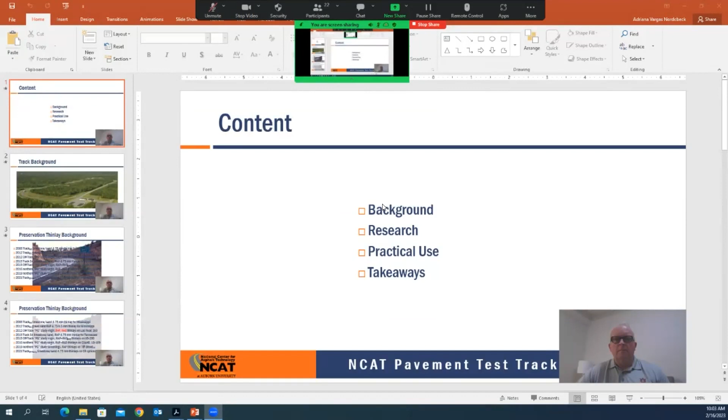Thanks, Travis. As always, I'll start by providing a little background, and then our PI, Dr. Adriana Vargas, will come in and discuss the research we've done with these types of mixes. We'll have some discussion on practical use, and finally I'll come back in at the end to provide some takeaways.

This all starts with the test track for us. I grew up with the Alabama DOT, and frankly I had a bias against the performance potential of the types of mixes we're discussing today, the smaller, finer screenings type mixes. I was taught at the DOT that these mixes are okay for low volume roads, but we have to be careful in how we use them with higher traffic volumes. The track completely changed my mind about that.

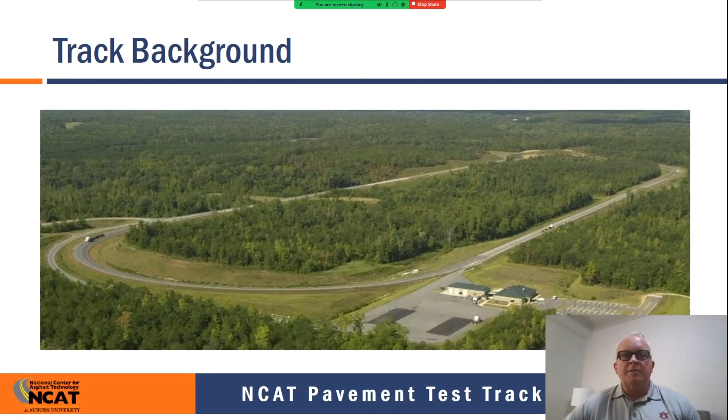We like to say that we're data people. We let the data speak with the research we do at the NCAT pavement test track and on the off-track test sections we've done, and that certainly is the case for the mixes we're talking about today.

I'm going to go through the track history and background of our experience with these types of mixes. For us, it all goes back to test section W6 on the 2003 track, the 2003 three-year research cycle, and everything else we did on and off the track is sort of a cousin to that mix we put on the track back in 2003 — which is still there, by the way, 20 years later and 65 million ESALs plus or minus later. This mix was a limestone screenings and sand mix.

The screenings are 70% limestone screenings, 30% hard sand. It's a natural sand, but it's processed, so it's really angular—kind of like a processed gravel screenings type material. It was a 4.75 NMAS mix that we put on the test track in a 3/4 inch lift.

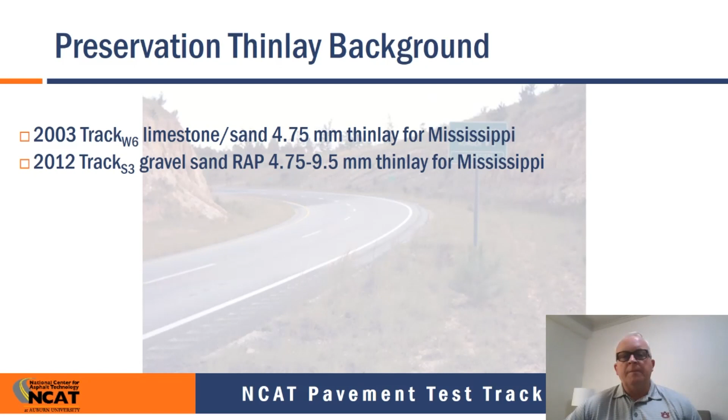That was in 2003 on section W6 for the state of Mississippi. Fast forward through the '03, '06, and '09 tracks—after 30 million ESALs through those three research cycles, that mix just really looked armor plated. It was providing good friction numbers. There's no cracking, no rutting. It just looks spectacular. It's on a perpetual foundation, but that's because when you put things on the track on a perpetual foundation, you're really trying to isolate the stresses to the surface layer, and that's certainly the case with this test section.

So in 2012, after those three successful research cycles, the state of Mississippi came back and said, hey, we would like to create a mix specification that can either be a 4.75 or a 9.5. There's some flexibility there so our contractors can use some of the gravel sands we have that are just scrap stockpiles left over from our Superpave aggregate processing. So we're building up a surplus of those materials.

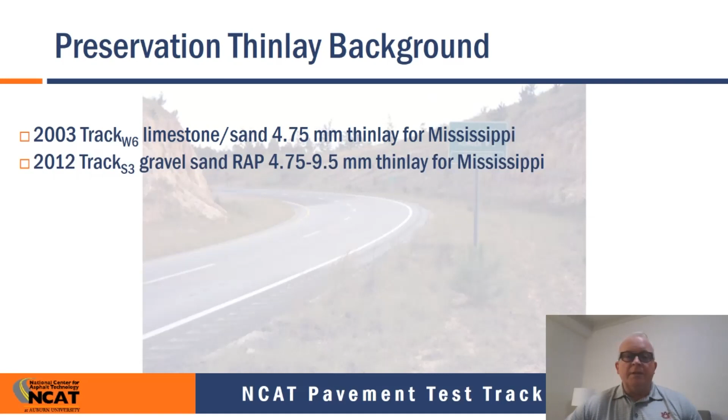That mix had RAP in it—I think it was 25% RAP. And so we put that on the track in 2012. It's still there. Section W6 and section S3 are still on the track, and they're still performing well.

In 2012, we went off track to do our first pavement preservation experiment, on Lee Road 159. So we looked back at our experience on the track and said, well, that limestone screenings and sand mix in W6 still looks great. Let's use that mix—it's really easy to run, very predictable. And so we used that as our core thin lay mix on Lee Road 159.

There are several different versions of that mix with different types of binders, including one version that's a 100% RAP cold recycle mix. There's a RAP version, a high RAP version that's 50% fine fractionated RAP, and then a 5% post-consumer shingles version of that mix. All those mixes are still in service on Lee Road 159, and this summer will be 11 years.

Go one step farther to the 2015 three-year research cycle on the track. Tennessee looked at what Mississippi had done in W6 and S3 and said, okay, in section S4—test section number 4 on the south tangent—we want to do the same kind of thing. We're going to do a limestone and sand mix, not the same limestone, this is Tennessee limestone. It's going to have RAP in it, and it's going to be a 4.75 thin lay, about 1.25 inches thick. They wanted to see if they could use it in a little bit thicker lift, because everything we had previously done had been either 3/4 of an inch or 1 inch.

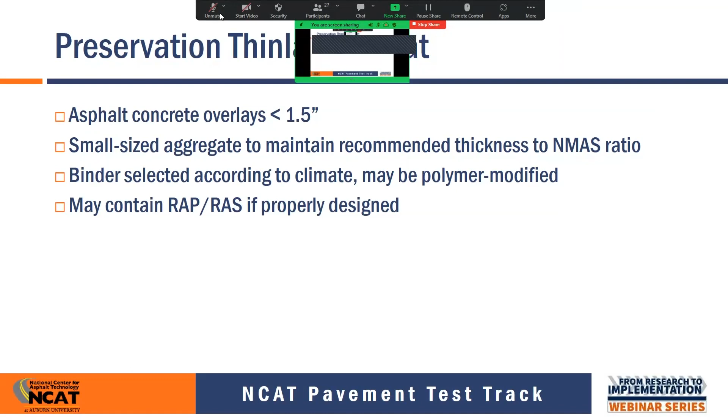I'm going to be talking about the thin lays and emphasizing what we have done for the PG study, since those were specifically designed with preservation in mind. But I wanted to start by giving a quick recap of what these thin lays are.

When we're talking about thin lays for preservation, if you ask anyone what a thin overlay is, you'll get different answers. There's no official definition, but we're generally talking anything less than 1.5 inches, probably somewhere around 3/4 of an inch to 1.5 inches. Most of our thin lays are 3/4 of an inch, we have a few that are 1 inch thick, and 1.5 inches is on the thicker side.

If we're going that thin, we need small sized aggregate to accommodate the thickness-to-nominal-maximum-aggregate-size ratio. In our case, our thin overlays use 4.75 millimeter aggregate, as Buzz was saying.

The binder and everything else is selected just like with a normal design. You can have neat binder, polymer modified binder, or RAP and RAS, as Buzz was saying. If you properly design it, hopefully you get the best out of it. But essentially, you're just doing an asphalt concrete and placing it very thin.

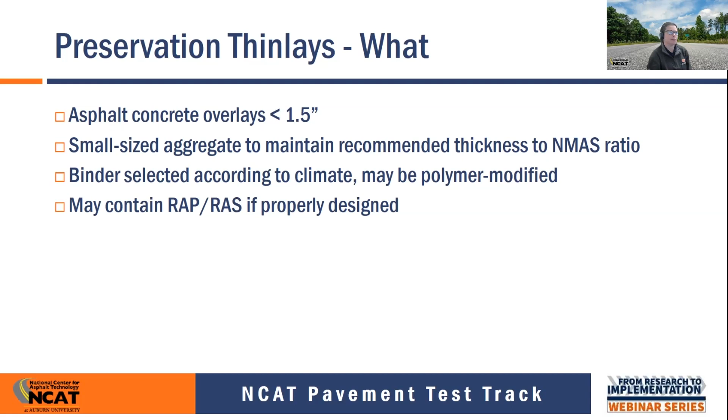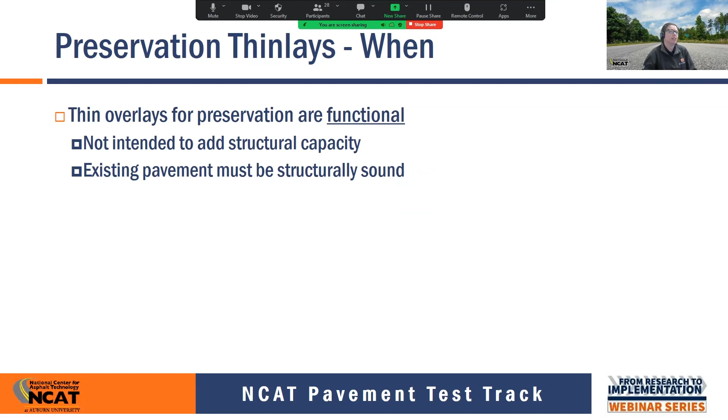When do we want to do a thin overlay pavement preservation treatment? Even though they're overlays, these are still functional treatments, so we want a pavement that is in good structural condition. It can have some distresses, but they shouldn't be load-related or structure-related. You have to have a good pavement to put it over if you want to truly get the best out of pavement preservation.

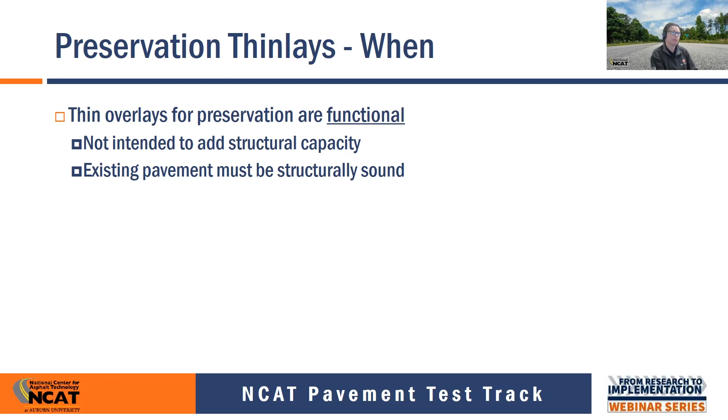Where do we want to use them? We can address things like raveling, oxidation, minor cracking, minor surface irregularities, and skid problems—those are all things you can address with a thin lay. And as you'll see later, we can also put them as a wearing surface on cold recycled bases, which is what we did on US 280 and 70th Street in Minnesota.

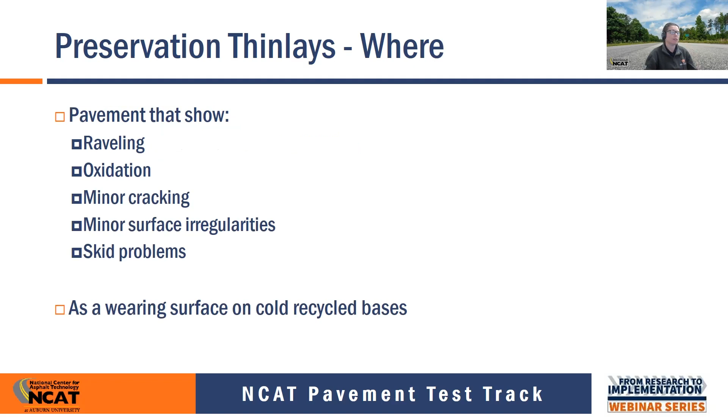And how we do them, it is not that different from just doing a regular paving lift. But there are things that you have to watch out for during the whole process.

For production, for example, if you're going to use the finer aggregate, it's easier to have moisture accumulate in those finer stockpiles, so that has to be controlled rigorously. This is one type of mix or application where using warm mix additives as a compaction aid can be very beneficial, since they're going to cool down very quickly.

So that brings me to placement and compaction. Surface preparation is very critical. Delamination could be a problem. You're going to pave real thin, and that interface is going to be very close to where those forces happen that will cause slippage. So you want to be very careful when cleaning up the surface and applying your tack coat. These are things you always have to do anyway, but you have to pay special attention if you're doing a thin lay.

And if you're doing it thin, the heat's going to dissipate faster, exponentially faster, so you've got to be ready to move on to the compaction process. This is where warm mix additives may be beneficial to help have more workability and longer time for your placement and compaction.

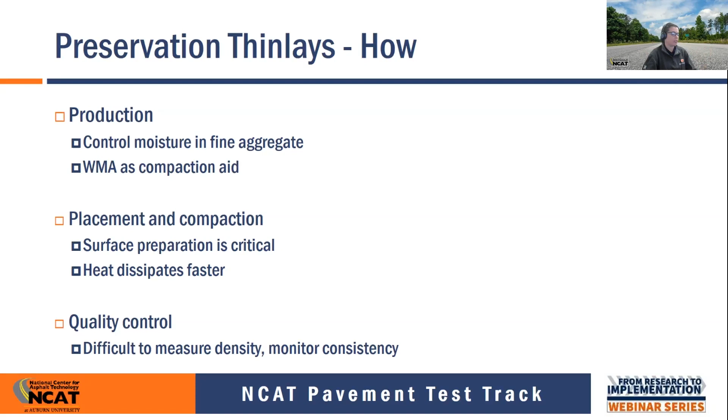Now going into our preservation thin lays for the PG study, we have test sections like Buzz was saying in Alabama and Minnesota. Most of them are 3/4 of an inch in thickness, with the exception of the ones on top of cold recycled bases. The nominal maximum aggregate size is 4.75 millimeters, like I said.

And for materials, again, like Buzz was saying, we have virgin materials, we have asphalt binder replacement mixes that have RAP and RAS. We've used neat binder, polymer modified, and highly modified binders. And from all of the sections that we have, they're ranging between 3 to 10 years in service. Actually, it's closer now to 4 and 11, but you can see it's a wide range of performance periods that they have been in service.

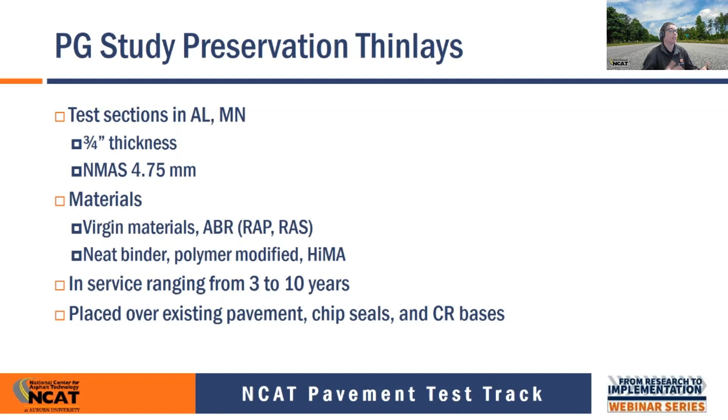And then we've placed them either over the existing pavement with and without micromilling. We've placed them on top of chip seals. We've placed them on cold recycled bases. So it has a lot of applications, I guess is what I'll say.

So just for an example, these are some shots of our test sections, and you can see at the top our Minnesota sections. On the left are low traffic, on the right are high traffic. The ones at the top are the newest ones, about 6 years since they were built. Lee Road 159 is 10 years in service, and then 280 is 7 years in service.

So thinking about how they look at this point, I think they have been doing a great job. We see a little bit of cracking in some areas. Minnesota, for example, has very aggressive thermal cracks, and that's going to be reflected no matter what. But the thin lays have been very effective in controlling the severity of those cracks and helping achieve smoother pavements compared to a pavement that didn't get anything done to it.

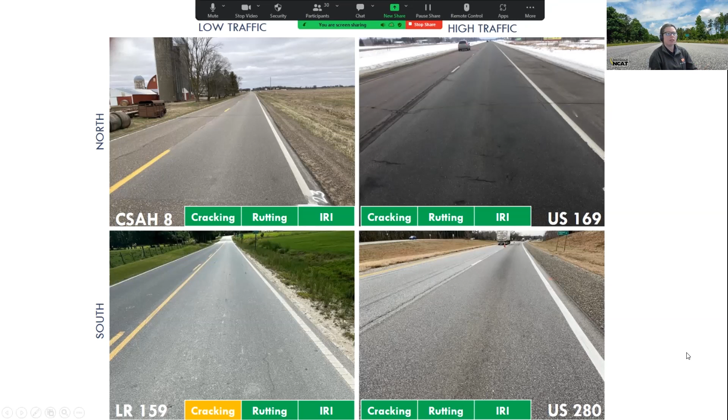So for the most part, they're in good condition. We use the MAP 21 performance indicators, so cracking for most of them is less than 5% of the total area, ruts less than 5 millimeters, and IRIs under 95 inches per mile. We have a little bit more cracking on Lee Road 159, just because it's older, so that's to be expected. But everything is looking really good, doing its job.

The next one here, to hide this, controls. Here we go, this is an asphalt binder replacement thin lay. This one will have RAP and RAS, like Buzz was saying, used with the balance mix design approach in mind. So we were able to optimize the use of recycled materials. And as you can see, they're also getting very good performance from the mixes.

Perhaps a little bit more cracking is to be expected compared to the virgin materials, but still just over 5%, far from the poor condition threshold, which is 20%. We do not have one of these overlays with the ABR design for Lee Road 159, which is where we did our first sections.

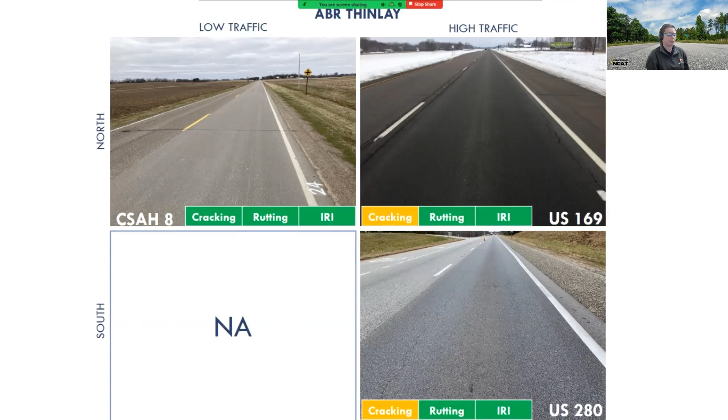So in there, as Buzz was saying before, we have the 50% RAP and 5% RAS. I'll show you what those look like today. Not really ideal, so a lot of cracking. Obviously these are mixes with a lot of aged binder in them, so they're going to be a lot stiffer, more prone to cracking. And that's exactly what we saw.

At this point, they are both cracked beyond 20% of the total area. They're still functioning and have decent ride numbers, so it really hasn't affected much other than, well, we have all this cracking in the surface. At this point, you probably wouldn't want to have a surface like that; we'll be thinking of doing something else to it.

If you're an agency, this is what happened doing just the volumetric design and substituting the material. We learned from that, and as you could see in the previous slide, we had really good results when doing balance mix design and optimizing those proportions.

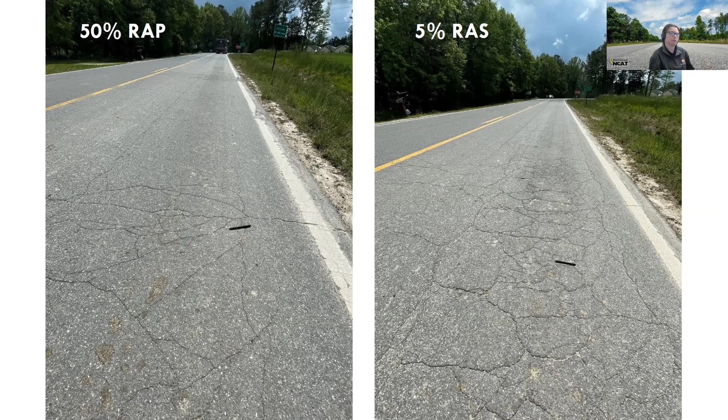A little bit more cracking on 280. I think that was, on my part, a little bit unexpected, but we also have to think of the initial condition of that pavement and how cracking performance is tied to the condition of the pavement at the time of treatment. So these had a little more cracking, and that's why we chose the combination of treatments. But still, overall, they look good.

We also have a thin lay on US 169. It's on a regular chip seal, so not a fiber mat, but we have similar results. Overall we have a nice surface, less cracking, or when we do have cracking, it's less severe, overall protecting that pavement and doing its job.

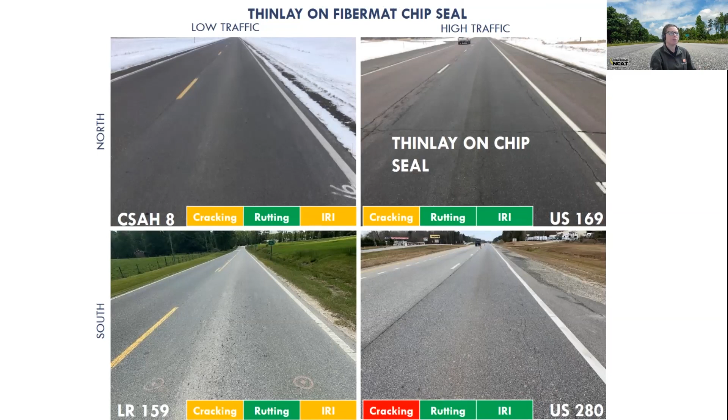For the thin lays on the cold recycle base, I think the big question here was, well, we're doing this cold recycle base - how thick does that wearing surface have to be in order to provide good service? So we put down 1 inch on a highly trafficked road.

Now this is for 7 years; I just took these pictures last week. For the most part, they're doing good. We have some cracking. This one, the thin lay on foam CCPR, we can see pumping and a lot more cracking than any of the others.

But I should point out that this section has a slightly different structure than the others, so it's overall thinner. We have variable thicknesses along US 280. The other three sections are more uniform, all of them, and thicker than that first one. So that's also tied to that structural performance - overall it just has less strength.

We also see cracking here for the thin lay on emulsion CIR, no pumping, and really the cracking is still pretty fine. So it has protected that cold recycled base, and it's done a good job. But I think in terms of how long was that good for, we're probably approaching that threshold in terms of those performance indicators.

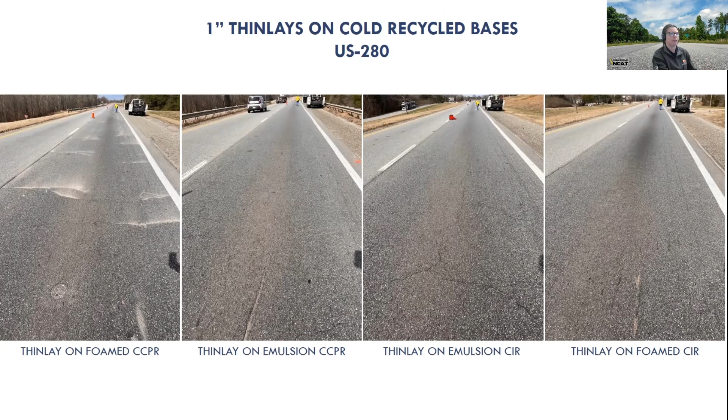We also have a thin lay on foam CCPR for Lee Road 159, and it's actually thinner, only 3/4 of an inch, and it's been down there for 10 years. So this is a lot less traffic, heavier loads still, because we have a lot of loaded trucks going in that lane. But you can see there, excellent performance. We have maybe a couple of cracks after 10 years, but overall it's done a great job. So in a low traffic setting, it's definitely been very effective.

So looking at the benefits, we want to ask ourselves, well, what are we concerned about? And in the case of our study, we found that performance means different things for different people. For the warm climate here in Alabama, we're concerned with oxidation, cracking, and cracking mainly along the wheel path, so fatigue cracking. For the cold climate, roughness is really their driving indicator, and that is really tied to thermal cracking - so transverse cracking and how rough pavements get from that. So it's important to do that benefit quantification in terms of what's relevant for each location.

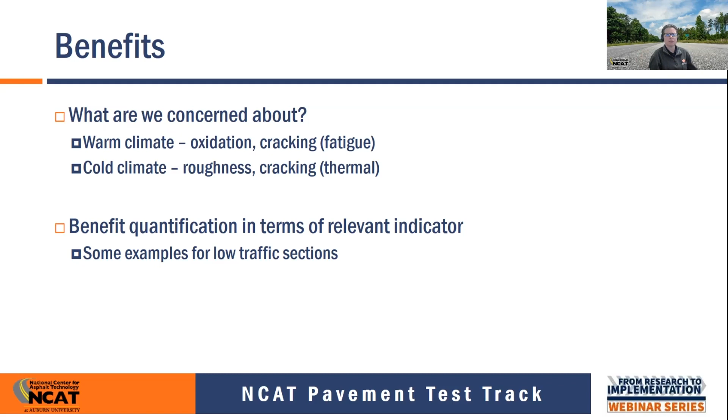So I wanted to show a few examples from some of the low traffic sections.

The virgin thin lay, for example, how is it doing in terms of cracking? We have on the left, Lee Road 159 here in Auburn, and then CSAH 8, which is the equivalent county road, but in Minnesota. You can see how cracking progression has gone. In our case, we are here at year 10, and we have reached about 10% cracking, so that will be in the fair condition threshold.

The red line is the control, so this is what will happen if we're not really doing anything. And then the blue is the treated pavement. Same thing goes for CSAH 8.

In their case, what happened was that the reflective cracking from those thermal cracks would happen. They reflected back, and then it just kind of stopped. Nothing else happened, so that's why it's kept kind of constant over time. At year 6, they're still in good condition, and then the control has a lot more cracking, but not as bad as what we had for Lee Road.

But if we did our benefit estimation in terms of that, what we do is we look at the time it takes for the pavement to get to that poor condition threshold and the difference between the treated and the untreated. So in the case of Lee Road 159, the control section reached the poor condition at just over 2 years after we started the study. Pavements were already 14 years old.

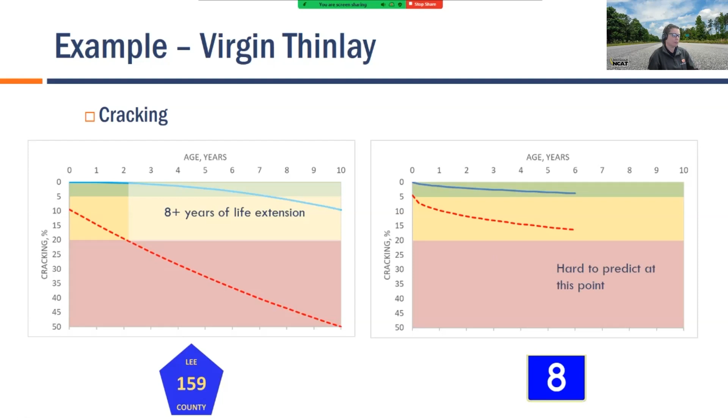For CSAH 8, it's hard to predict at this point. You can see those lines are pretty flat, and even going to year 10, it's nowhere near that 20% threshold. So in terms of cracking, it's still hard to make a prediction at this point. But like I said before...

For the northern climates, IRI is a lot more relevant than cracking is. So we want to look at IRI and what's happening with those sections. You can see here at the top, the CSAH 8 section. So we have a treated pavement and an untreated pavement with the dashed line. This is the control, showing how IRI is going to progress over time if we don't do anything.

And then with the thin lay, we were able to, number one, get that IRI just corrected and dropped significantly immediately after construction, and then over time kind of sustained that deterioration rate.

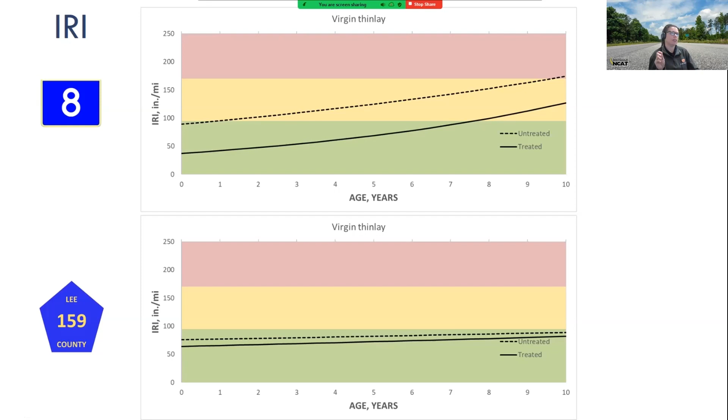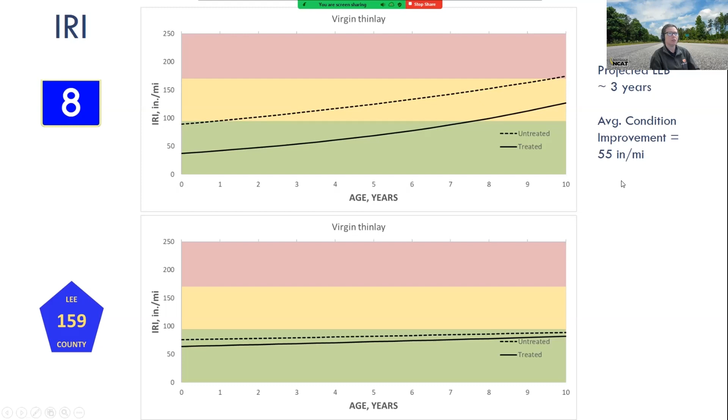Then for Lee Road 159, it didn't make that much of a difference — we were pretty good to begin with. So we put down the thin lay and obtained a minor benefit, but the important thing is that over time we've stayed pretty constant. So in this case, for the Minnesota section, we're projecting, if we were to extrapolate, a life-extending benefit of about 3 years and an average condition improvement. The difference between those two lines over time is 55 inches per mile, which is pretty significant since IRI is such a big deal for the Minnesota folks. In our case, nearly constant over time and a slight ride improvement, which I think we'll take.

So if we want to quantify in terms of cracking for our southern sections, here's a summary of what we have. What I want to point out here is that we see a lot of 10-pluses in that table. The two that didn't perform that well have already gone to the poor condition category — more than 20% cracking — out of the 50% RAP and 5% RAS thin lays. The others are still going strong, and I think we'll continue to see good performance out of them.

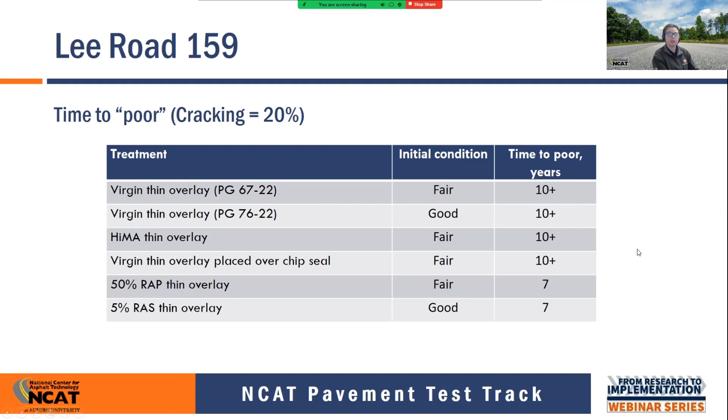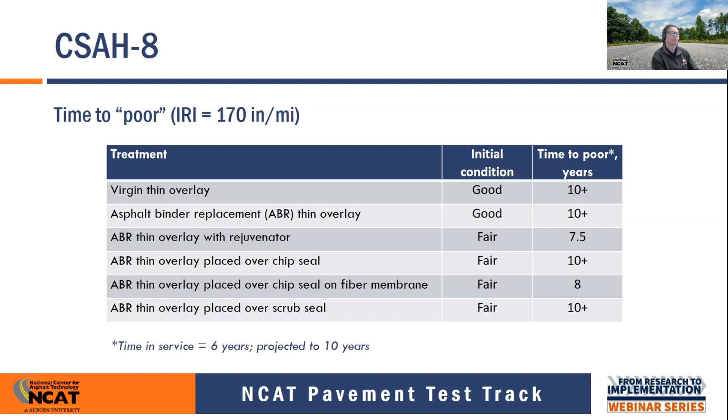One more thing that I wanted to bring up is texture and friction, because that could be a concern. We're doing sections with aggregates that are very fine, so that could definitely have an effect on texture, and we do see that. So this is again an example from US 280, the virgin thin lay.

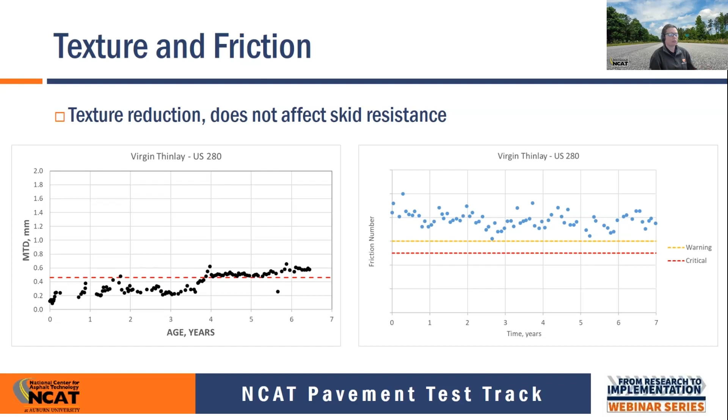So to summarize here, we have those thin lays as really effective preservation options. We can also use them to protect those cold recycle bases and address different issues like I showed. They have shown significant life extension, which is good. And as far as producing them and placing them, it's very similar to any asphalt paving operation, but we want to be especially careful in some areas. And we haven't had any friction problems resulting from application of those finer mixes. So with all of that, I think this pretty much summarizes our experience from the pavement preservation study side.

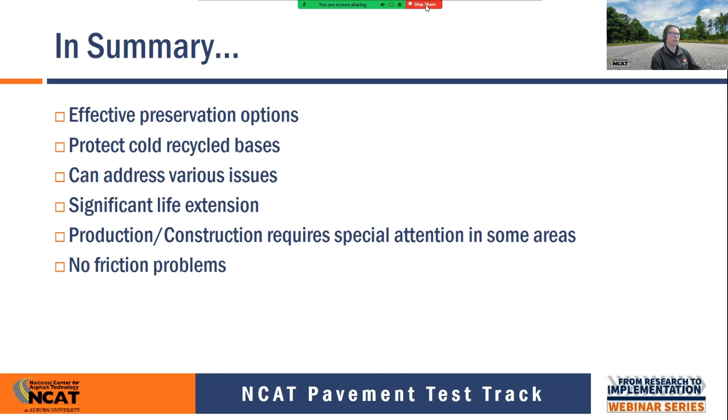And I think, is it James' turn?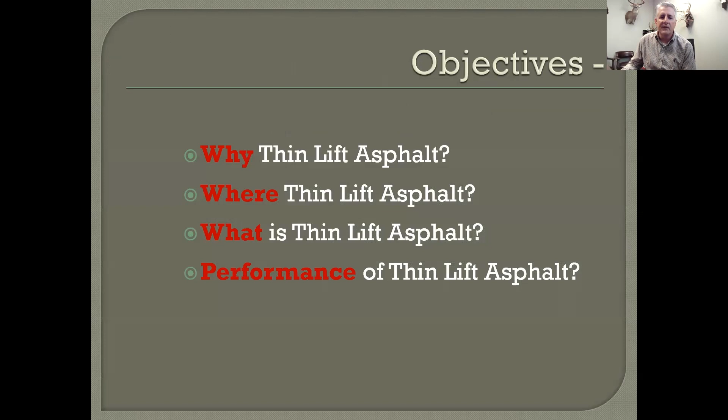Thanks to Buzz and Adriana, they did a wonderful job sharing some of the performance aspects of what we've actually seen in Mississippi. So I'm going to shift gears and talk about how Mississippi approached implementation of thin lift asphalt. I'll break it down into the why, where, what, and then finish with some of our experience with performance.

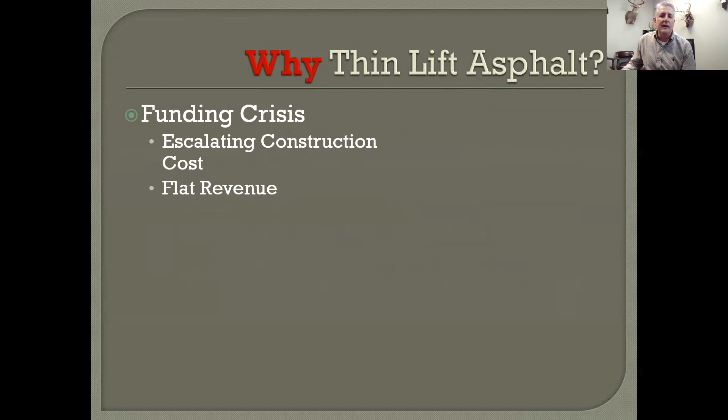You can't really talk about the why without, from an agency perspective, talking about funding. Over time we've dealt with increasing construction cost, and even though revenue is ticking up in a lot of states right now, with inflation as it is, we're always battling doing more with less. That definitely plays into the why of thin lift asphalt.

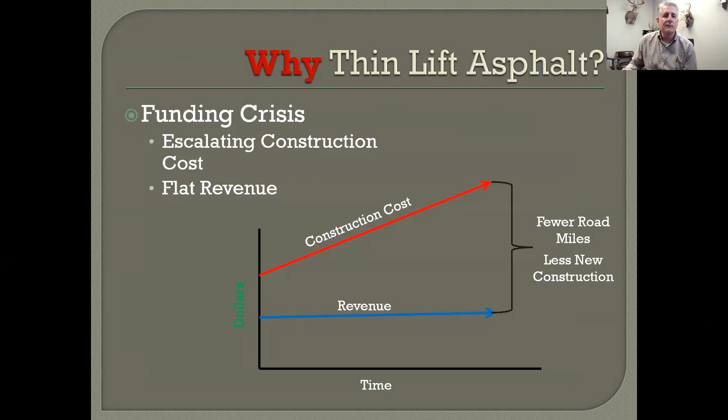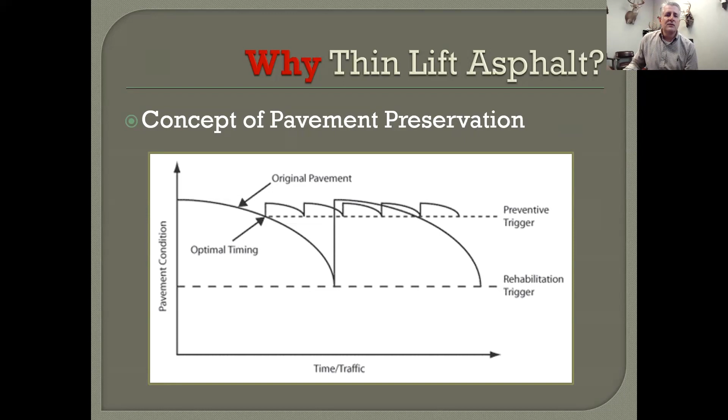Adriana did a really good job communicating the concept of pavement preservation, so I won't go into that. But from a state agency perspective, if an agency can keep good roads good and avoid reconstruction, what we found in Mississippi is that reconstruction cost could be as much as 10 times the cost of doing routine preventive maintenance. All of that considered goes into the why from an agency perspective.

But thinking about the traveling public, with thin lift asphalt what we see in Mississippi is we're routinely measuring 30 to 50% ride improvement, even though we're only paving at times 3/4 of an inch with our thin lift asphalt. So there's obviously some benefits to the public related to ride.

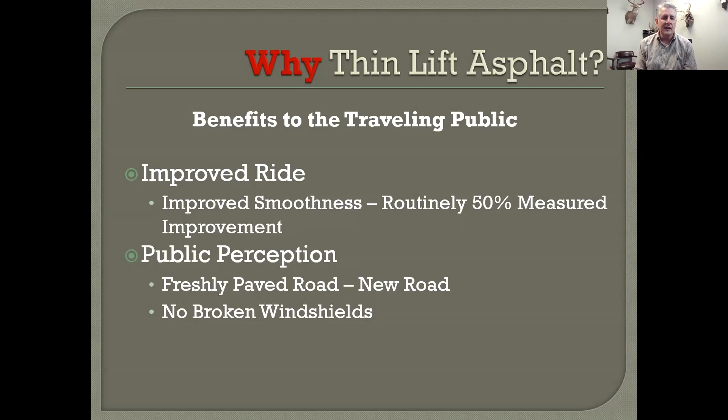Also, what I've found over my career with public perception, when you pave a road, whether it's a thin lift or you completely reconstruct or do a mill and inlay, the traveling public feels like that's a new road. So the thin lift definitely fits that bill as far as perception with the traveling public.

Also some benefits to the traveling public: we're preserving the underlying pavement structure. As Adriana and NCAT have shown through their preventive maintenance research, pre-treatment condition does matter, so we need to apply these treatments at the right time. With these thin lift asphalts we see lower permeability, so we're protecting and keeping that water out of the pavement structure.

We also see that these mixes are very crack resistant. I think that's due to the fact that in Mississippi, while we allow 25% RAP, we're getting more AC in those mixes. So with the idea of balanced mix design coming down the pipe for agencies, producers and contractors, these mixes really appear to fit that bill from a crack resistance standpoint.

Also on the why, as Adriana showed, we're seeing very good performance out of these structures. If you break it down, I like to think about life cycle cost as a cost per square yard per year. While a thin lift asphalt may have a little higher initial cost than some other preventive maintenance treatments, if you apply it on a road that's in fairly good condition...

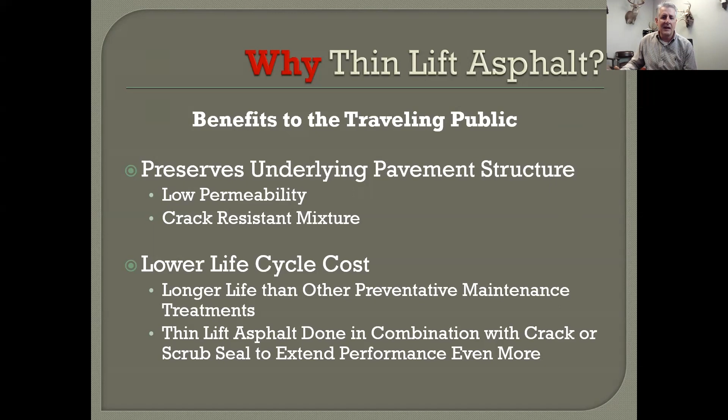One thing we've also seen, due to some work over at NCAT, is that in Mississippi we are doing a lot of combination treatments where a road's pre-treatment condition, from a cracking standpoint, is a little further along than you would like. We've seen very good performance doing scrub seals to try to seal those cracks up and then doing a thin lift overlay over that. Those combination treatments seem to have some synergy that gets really, really good performance.

Spend just a minute talking about the where. When we started this back in 2003 with W6, we kind of viewed thin lift asphalt as a low volume road mix. What I mean by low volume road, the state highway system in Mississippi, we call them 3-digit roads - they're kind of collector roads. We have a lot of farm to market roads.

Those low volume roads, a lot of times they don't have a lot of truck traffic either, if it's outside of our agricultural areas. So that really was a niche that we wanted to kind of catch with the thin lift asphalt. At the time, some of these lower volume roads were on a maintenance cycle of maybe 30 to 40 years based on funding. So we were really looking for a niche to spread our money and go about taking care of these roads. And from a preventive maintenance standpoint, the thin lift kind of fit that mold.

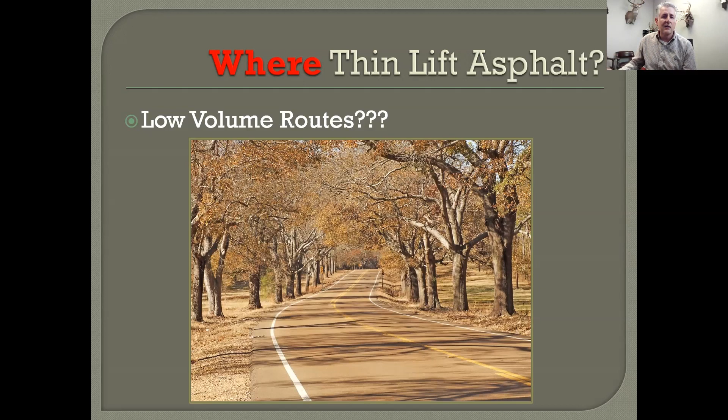But I've got question marks on the low volume routes, because what we saw with W6, and then we replicated that with S3, we saw really, really good performance under high traffic. So if the mixes are designed appropriately, I'm not sure this thin lift asphalt is a low volume road mix. It can be used in a lot of different applications. In Mississippi, we've actually used it on interstates for leveling and doing some things. We may not put it on the surface because of some of the other issues Adriana touched on, but we have put it in higher traffic, higher truck traffic type areas, and it's worked very, very well.

Roads that are structurally sound. Obviously, if you have rutting and you're trying to put a mix down at 3/4 of an inch, you can have some issues there. If you have structural cracking, that would be an issue where, you know, state agencies often get in the position of just having to do something. But if you really want to set a thin lift asphalt up for success, make sure that you have that minor kind of top down cracking, and little to no rutting.

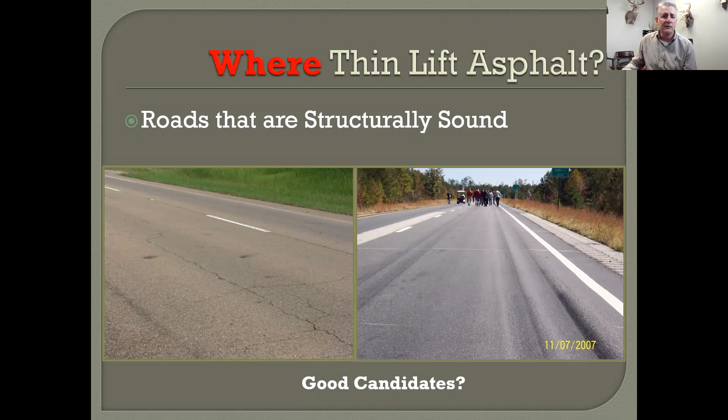When you talk about the where, it's extremely important to have good data. In Mississippi, we've been very fortunate to have very good system-wide pavement management data. The Mississippi DOT did a great job developing distress decision trees that helped give that menu of treatment options for various types of pavement distress. Thin lifts were built into that probably a decade ago, so that gives you a time frame of how long Mississippi DOT has been using that as one of the options for preventive maintenance.

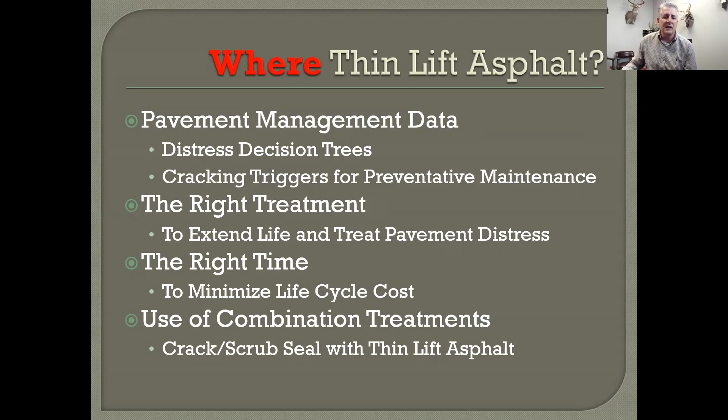Obviously, using that preventive maintenance or pavement preservation motto, the right treatment at the right time to extend life, treat pavement distress, minimize life cycle cost, all of those things apply. Again, what I have seen personally, and what Mississippi DOT has seen, these combination treatments on roads that are maybe cracked a little bit more than you'd like seem to work really, really well.

What that resulted in was these huge mountainous stockpiles of kind of byproduct materials at our aggregate facilities. A lot of times that material was, you could call it manufactured sand, you could call it 3/8-inch, you could call it screenings, you could call it whatever you want to call it. But that was kind of a byproduct of starting to use these SMAs and OGFCs that were more of a gap graded type material. So that really led to a partnering effort.

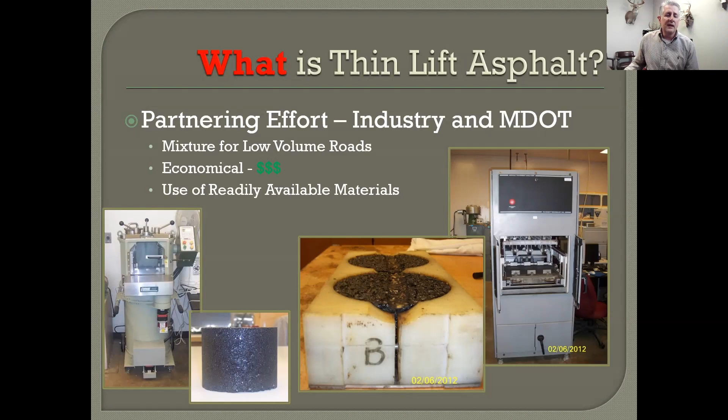And what you find is that as we go through some of the general specifications, what we really set out to do was to allow the producer to design a mix that would perform, but really optimize the materials that they had on hand to try to control cost. If a producer can use a byproduct that couldn't be used for something else, typically that helps with cost. So one of the things we did is we allowed the designer, based on the materials that they had, to...

...design between a 4.75 and a 9.5. Most of these mixes fall somewhere in between because we're using a lot of that manufactured sand or that 3/8-inch material. We also looked at air voids, and one of the things we looked at related to air voids was the permeability. What we found was that even at, say, a 6% design air void, we were still getting very good permeability performance with those mixes. So we allowed the designer, based on their materials, to design somewhere between 4 and 6%.

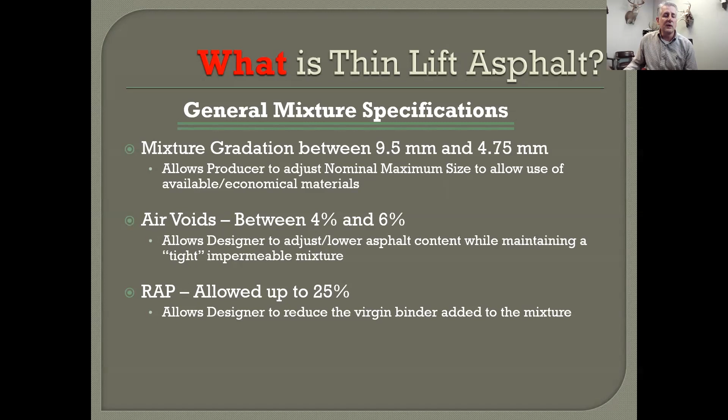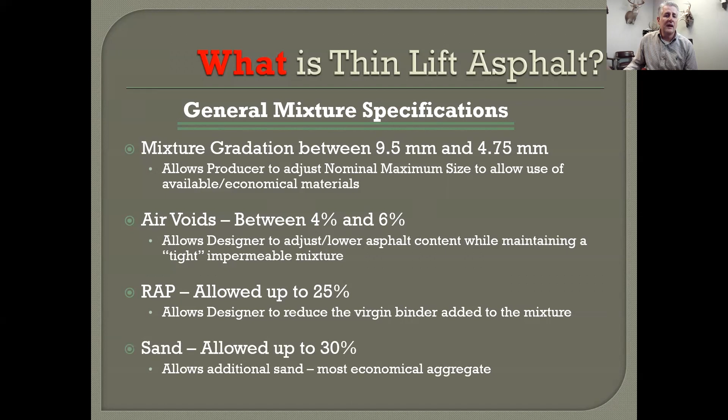We allowed 25% RAP. What we saw in Mississippi was that most of our producers, either through the specifications or through just their normal use, were crushing, processing, screening RAP. So we said, okay, let's allow RAP to be used up to 25%. Typically that's a fine RAP, and it helps with that virgin AC. So that helped control cost. And then we allowed up to 30%, kind of a hard sand. We allowed that. Sand is the cheapest product we have.

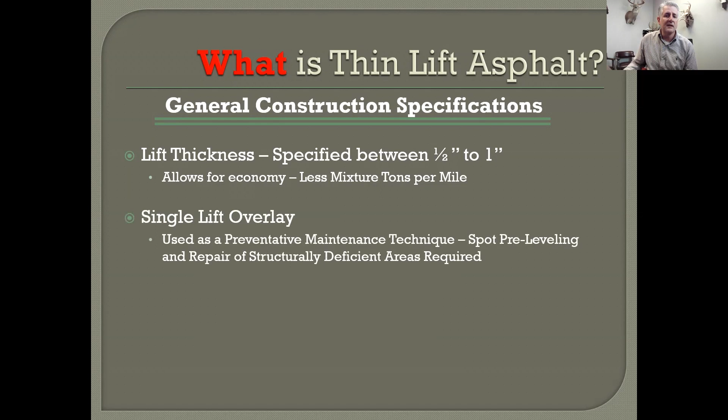Then on the construction side, lift thickness, in the specifications we put, from a 1/2 inch minimum to 1 inch. In reality, 1/2 inch is too thin. Typically, Mississippi DOT is specifying 3/4 of an inch to an inch. A lot of times these are 3/4 of an inch in variable type mixtures. A lot of times this is done as a single lift overlay, although a lot of the jobs now are a combination treatment depending on the pre-treatment condition.

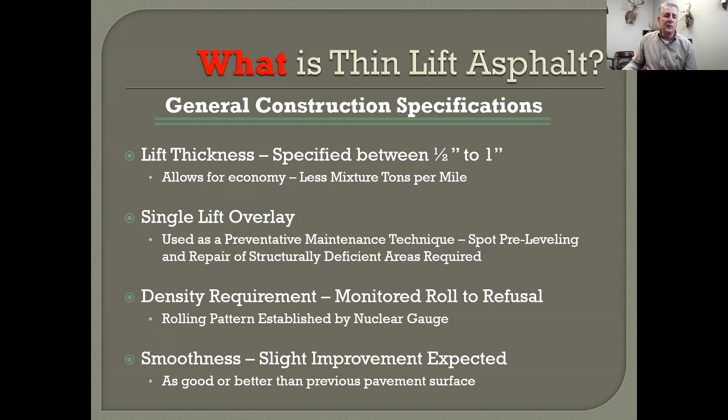Then Adriana talked about density. In the specification, there's a monitored roll to refusal with that material. That seems to work very, very well. And then smoothness, the only smoothness requirement in the specification, because this is preventative maintenance, was just don't make it worse. So that was kind of the approach with the specification. But in reality, what we see is we do see routinely about a 50% improvement.

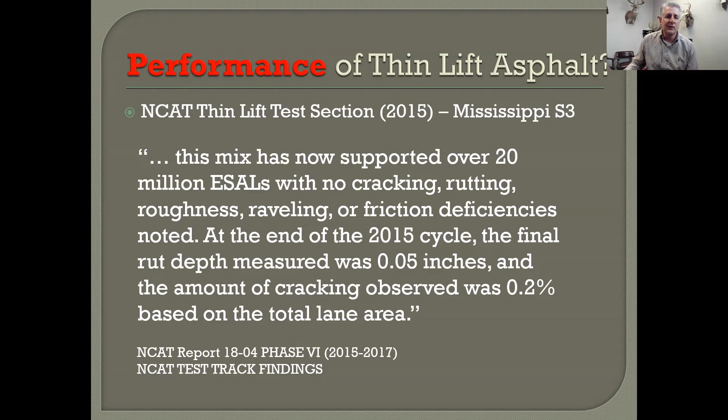So shifting gears to performance, S3 at the end of the 2015 cycle, this was a statement that was in the track findings report. And as you can see, after 20 million ESALs, there was essentially no rutting. The amount of cracking was less than 0.2%. Very, very good, solid performance. I will tell you, during the planning process for S3, we actually doubled the material to make sure that if the mix did not perform through an entire 10 million ESAL cycle, that we have material on hand to replace it. And it's still in place today. So just a testament to the performance of that mix using local materials.

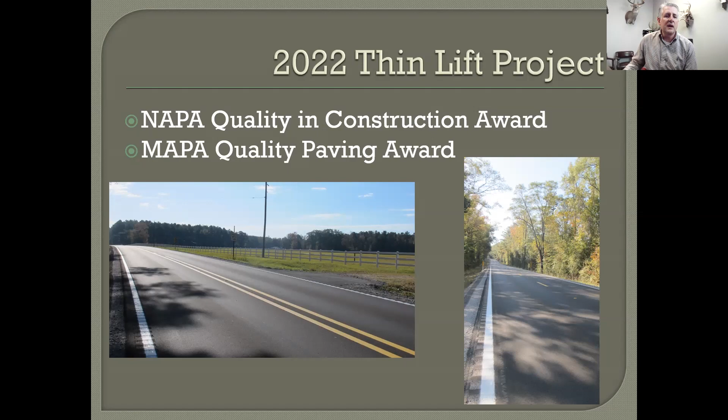And I'm going to finish up with some recent success. As Travis mentioned, I now work for APAC, Mississippi. And in 2022, we paved a state highway. It is a fairly low volume road highway, but this particular road got a NAPA Quality in Construction Award, and also got a MAPA Quality Paving Award for this past year.

Just a little bit of notes about the job itself. This particular job, because of the pre-existing condition of the pavement, the DOT decided to do a 3/4 inch leveling lift with that thin lift mix, and then overlaid the entire job with a 3/4 inch surface. So structurally, that wound up being 1.5 inches of mix, but in reality, a great job.

Just from a smoothness standpoint, overall, there was a 72%, 73% improvement on the ride. And on average, across the entire job, the IRI was a 30.8. Extremely good job. This is typical of jobs that we're seeing in Mississippi with the thin lifts.

And with that, I'm done unless there's any questions.

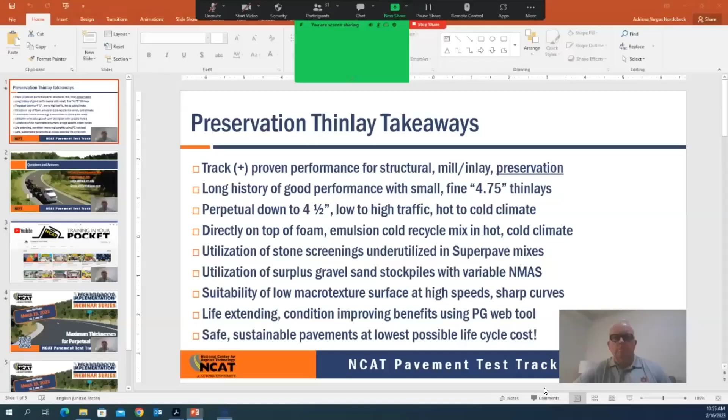Well, thanks for that great information, and so I'm going to come in at the end and try to kind of pull all this together with some important takeaways for attendees related to these smaller, finer screenings type preservation thin lays.

Well, you know, we've got track proven performance for these mixes. We always say we do 3 types of research. We do mix and materials research, milling and inlaying. We do structural test sections, and then we do preservation research. And these mixes very much fall into the preservation toolbox.

Have a long history of good performance with these mixes everywhere that we've put them. As I mentioned earlier in my part, the only place really that we've been disappointed is when we had the volumetrically designed 50% fine fractionated RAP and 5% post-consumer shingles. And when we went back in and did a balanced mix design with that later, that was on 159. When we moved out to 280, we were very, very pleased. So we've had good performance in both of the climate extremes in the Gulf Southeast and then in the frigid north.

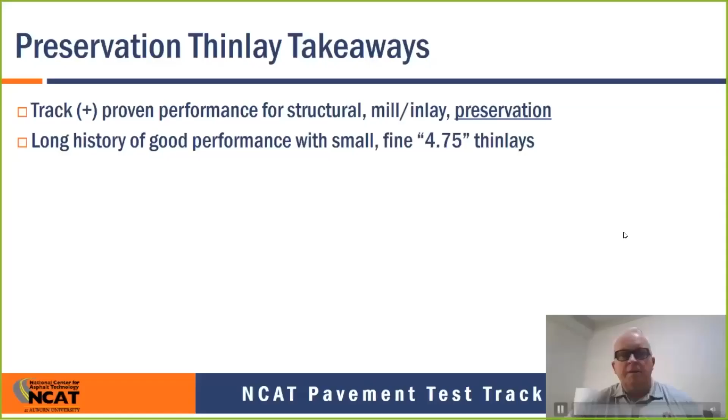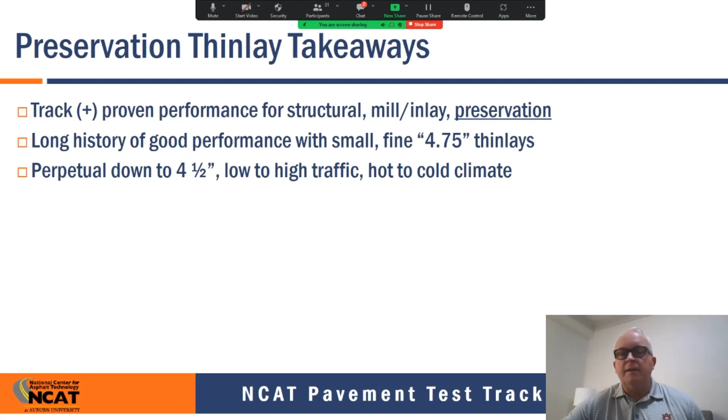Using regional materials down here, as well as regional materials up in Minnesota, we've done these on test sections that vary between perpetual sections like section W6 on the track that started all this, all the way down to 4.5 inches thick, the thickness of the structures up on 70th Street in Minnesota. Lee Road 159 was about 5.5 inches thick, but the thinnest we've done is 4.5 inches on 70th Street. Traffic has ranged from low to high, low traffic on Lee Road 159 and County State Aid Highway 8, all the way up to really high traffic on US 280 and US 169, in both climate extremes.

We've done this directly on top of both hot mix and foamed cold recycle mix, emulsion cold recycle mix, in the hot climate and the cold climate. We've also done the off-track preservation test sections at the track on top of engineered emulsion, engineered emulsion plus recycling agents, and also just recycling agents in addition to foam, and had good performance with all of those configurations.

This allows us, like what happened in Mississippi, to utilize our screenings that are building up surpluses in a lot of regions. Not everywhere, but in some stone states you see screenings mountains that have built up over time, similar to the gravel screenings surpluses in Mississippi. These mixes allow us to use those types of materials because they are smaller and finer. Like in Mississippi, they created a relatively open specification where it could be either a 4.75 or a 9.5, but it was a great way to use those materials.

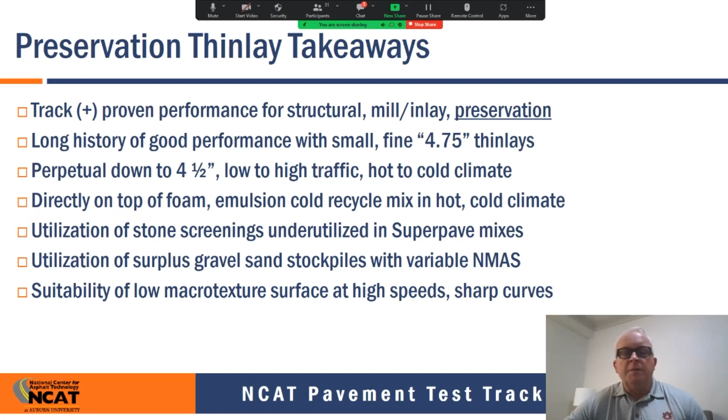The only caution I'd provide with these mixes is that they are low macro texture mixes, these dense graded 4.75 preservation thin lays. So if you need macro texture, somewhere for the water to go to stay out of the pavement-tire interface, like if you have high speeds or sharp curves, just make sure you understand that low macro texture is a feature of these mixes, and account for that when you specify their use.

In the preservation study, as Adriana described, we've got really good information on the life extending and condition improving benefit of these mixes, like we do with all the other emulsion treatments. I think it's a really important option in our pursuit of safe and sustainable asphalt pavements at the lowest possible life cycle cost.